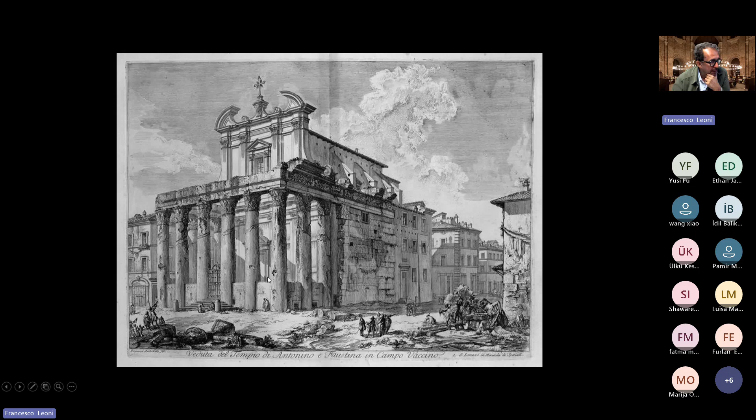of the temple. In fact, if we move back to the previous view, you can see that the level of the ground is basically higher than it used to be during the level of the temple, because the level of the Roman temple was here, while the level of the church is definitely taller, because centuries of dust, ground and overimposition of layers in the city completely changed the possibility of appreciating this building the way it was in the beginning.

Here you can see another building, with restored staircases from the past. And here you can see the way this temple appears nowadays, if you go down and visit the Roman Forum during a spring day like those we are having now.

So this is the point we start with. The main consideration is about layers, and the fact that a building is a living organism that, like all living organisms, changes through the centuries — in this case, the final output of these changes is the building we have nowadays. That doesn't mean the building can't change any longer. What we have to do as architects, as museographers, is to detect, to define, to understand the different layers, and to make them understandable to other people, creating this readability while keeping the unity of the building.

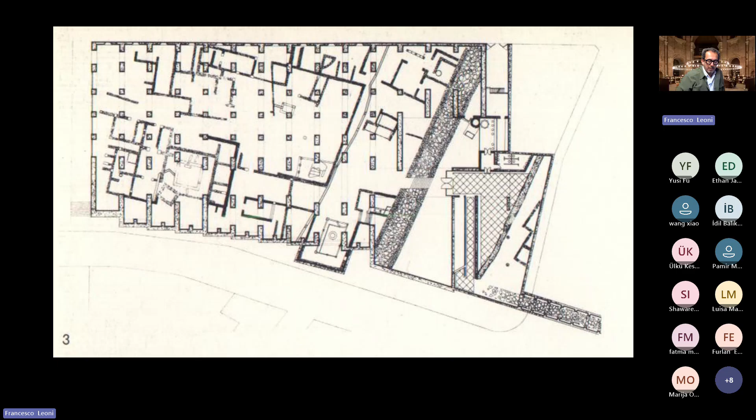But keeping clear that the new intervention, despite conceiving a Roman atmosphere, was something different, something new, and not a completion of the Roman structure. In fact, the interior of the museum is incredibly Roman-like to be understood, because when you are inside this building, you can feel the Romanity of the space, of the architecture.

But on the other hand, the fact that this is a completely brand new, completely contemporary building is extremely clear. You can't be misguided in that.

And if we go down to the lower floor, you can see how the new intervention doesn't completely fit the Roman tissue of the city from the past.

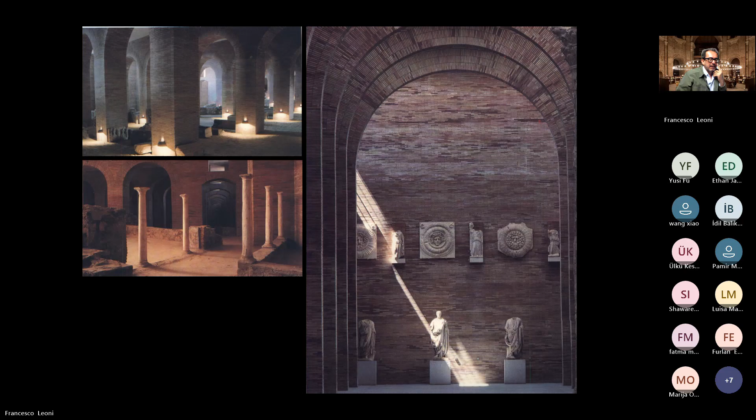Other images of this incredible building. Here it is. Some enlargements, and in this main picture it can be easily understood what is a ruin and what is the brand new building, despite keeping a Roman atmosphere with a contemporary building.

That is a very subtle feeling, a very subtle threshold that requires great sensibility. That is the sensibility that hopefully we're going to develop through our journey together in the Piranesi Prix de Rome, and if you want, even through the master course.

Another paradigm that we always keep in mind is the reconstruction of the Roman theater in Sagunto, a small city close to Valencia in Spain, where a Roman theater used to be. Apart from a restoration during the 19th century, it was restored by Giorgio Grassi with a project from 1985.

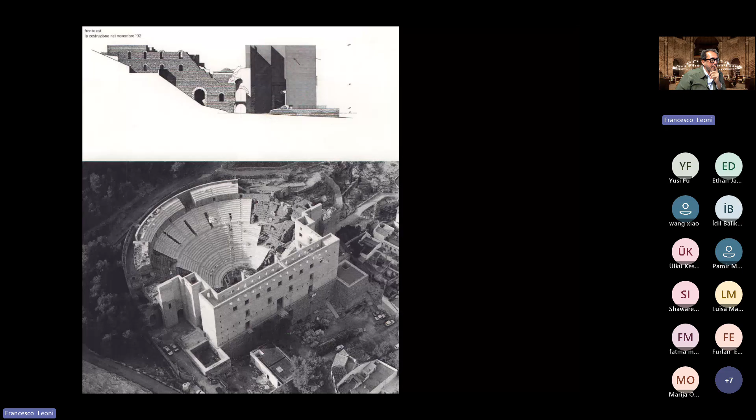This is an image showing the building without the covering, and showing the elevation of the building. Here you can see the building site before completion, before the putting of the roof on the scenery building. And this is the final effect of the building.

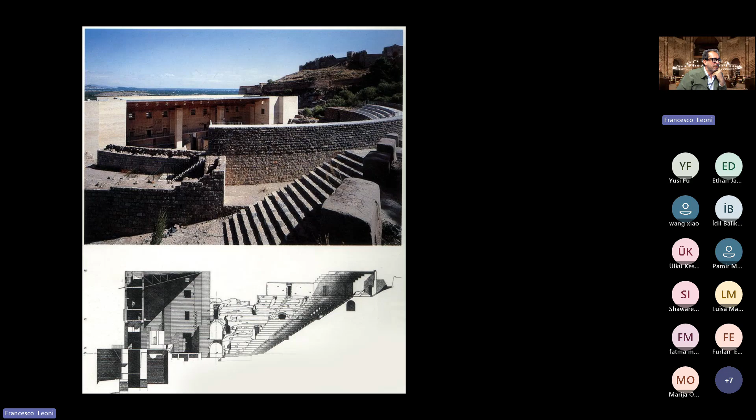Here you can see pretty clearly in the section all the typological parts built up again, and mainly the fact that the scenery building was exactly as tall as the Summa Cavea level of the theater, the so-called cavea. When you enter this building, you can completely understand how this complex used to work, and you can feel the volumetric experience that a Roman visitor would have experienced in that period.

Here you can see other pictures from the place. This could be meant as a museographical intervention, but at the end of the day, this museographical reconstruction gave back the possibility of using the theater for its original function, that is, being a theater. So this museum is used very intensively as a theater and hosts a very important season every year during summer for the people of the surrounding area, who can go there and appreciate performances.

This is the only part that gives a chance to decoration, but in this case, the decoration is done through an anastylosis principle, reusing parts of the ruins found on site to give back the partition of the three orders of the scenery building. Those parts of columns and orders are exactly original, apart from the elements that are clearly filling the missing voids.

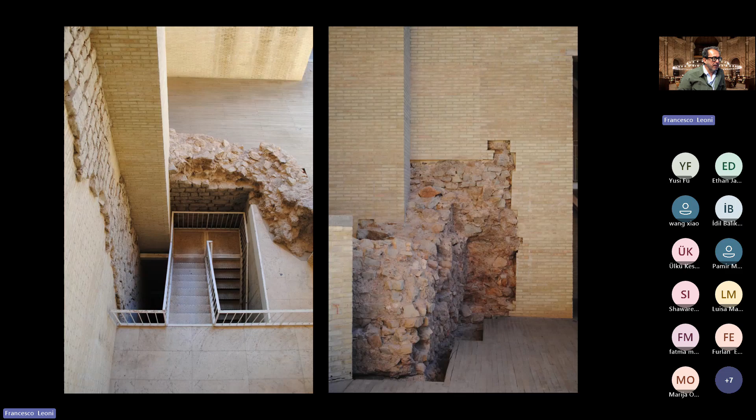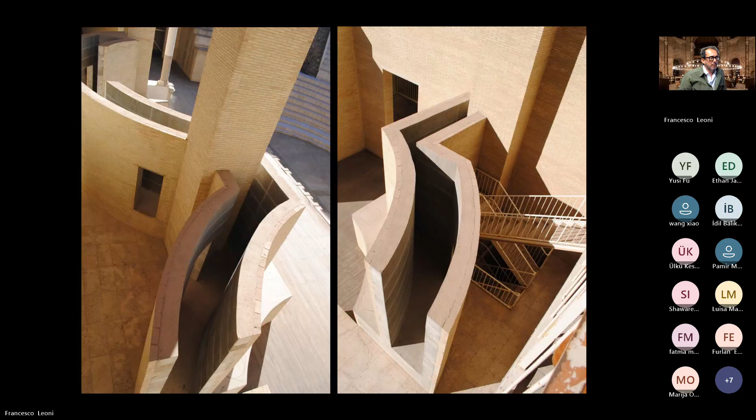Another picture of this building, which, as I told you, has been conceived as a museum. Here you can appreciate the way Giorgio Grassi didn't want to suggest any kind of finishing of the original building, keeping the relationship between the ruin and the new reconstruction overimposed. Some detailing of the walls, the original walls.

And that brings all of us to the topic of reversibility. Reversibility is the concept that has to do with the possibility of completely removing an intervention, bringing the site back exactly to the state it was in before the intervention.

Let us talk about this small temple on the Acropolis of Athens. This is the so-called Temple of Athena Nike. On the left side, you can see the temple erected. On the right side, the temple removed for restoration. In fact, the temple was completely dismantled, moved to the laboratories, restored and implemented, and then built back in its original site.

This is the frontal view. This is the side view. This is very clear, somehow even more striking - the presence or absence of the temple changed a lot.

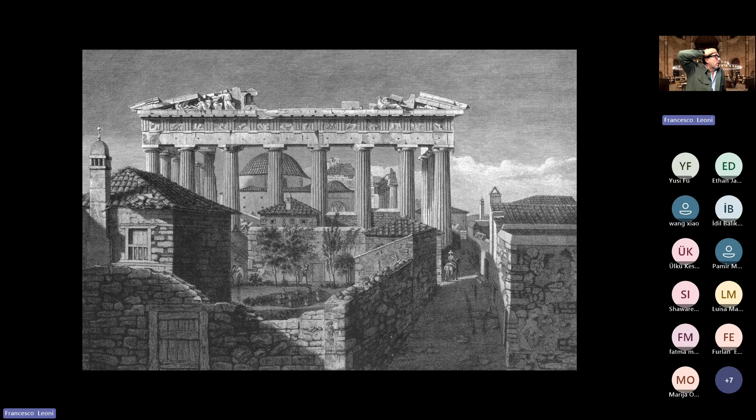That should make us ask again about layers, and also about truth. Still being in the Acropolis of Athens, here you can see how it used to appear in the 16th century. The main building with the 8 columns in front can easily be recognized as the Parthenon, a temple from the 5th century before Christ.

But through the centuries, other buildings were settled in this area. You can see in the first row a private house with a garden and even a pond, trees where a woman is picking fruit, two guys dialoguing or arguing, and a man moving away on the back of a donkey. Even more, there was a mosque settled inside the Parthenon, which itself substituted a former church. So even the Parthenon underwent a lot of changes through the different centuries.

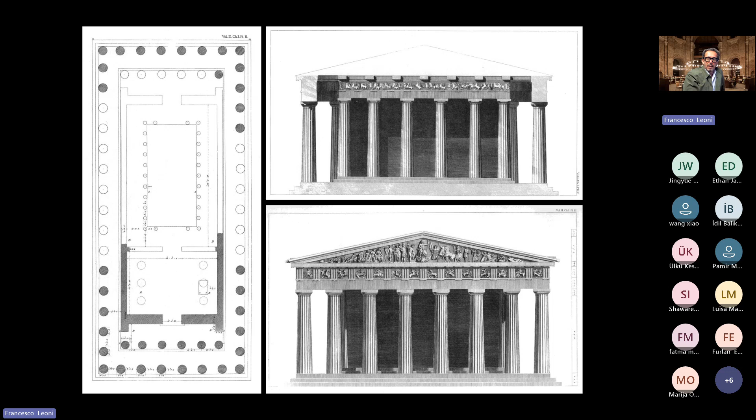Luckily, we still can recognize the original elevation and plan of the Parthenon. At the beginning of the last century it used to appear almost naked, a building missing the cell, the pronaos, and obviously the roof. Lots of parts were missing. That somehow is an amazing, romantic view, but on the other hand it takes away the possibility of understanding how the building used to be.

In this case, reversibility, despite not being fought for from the start, is still possible, because by reassembling all the parts spread all over the territory around the Parthenon and implementing the missing parts, you can reobtain your Parthenon.

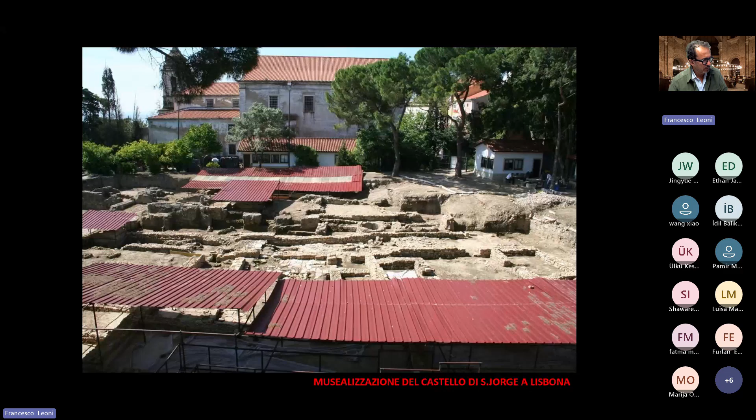This is what you would have seen if you had visited the site until 20 years ago. To bring this area back to life, a project was sought through a competition, which was won by Carrilho da Graça. He started, first of all, with the recognition and recognizability of the ruins, to understand exactly what existed there.

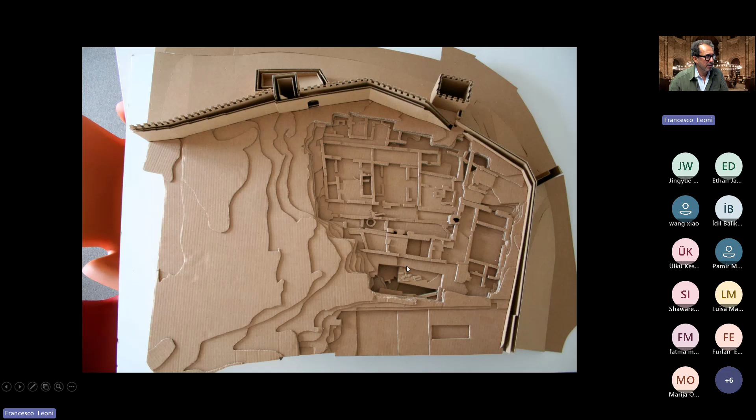We had mainly layers from a couple of eras: some ruins from the Iron Age, and another main layer, the recomposition of a couple of Islamic buildings, courtyard houses, in this area. This is the Iron Age ruin, and this is the Islamic houses area.

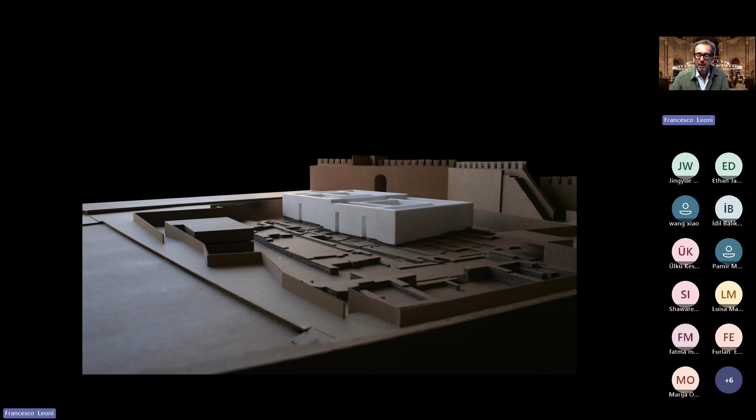The project basically consists in making the Islamic houses understandable and readable, while covering the Iron Age part. The project is not that different from what you can see in this very brief, raw model: the Iron Age ruins were covered with rusty metallic slabs, while the Islamic Age houses were somehow re-extruded on the ruins, exactly on the same place as the original ruins.

That helped people a lot to understand the real volumetric presences in the area, and also gave the possibility of having spaces for exhibiting some collections on site. This went along with giving back accessibility to the area, cleaning the pavement and recomposing it through a process of rammed earth.

The first thing Carrilho did was to redefine the holy precinct, the boundaries of the area, with elements in Corten steel that define what is inside and what is outside the archaeological area, accompanying people as they go down through this process of entering the ground, as any archaeological area should, defining exactly the limit of this museographical intervention.

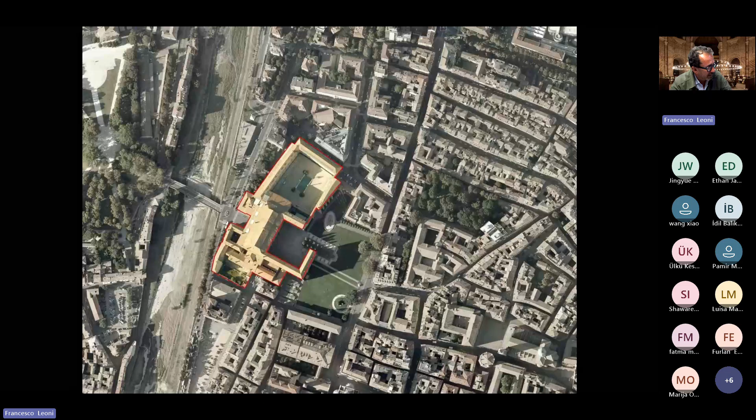This is the project for the musealization of the Pilotta Palace in Parma, Italy, by Guido Canali, an intervention realized over different moments, part of which has been closed to visitors in the last 10 years. Here you can see the Pilotta of Parma, actually called Palazzo Farnese, the building that hosts this intervention.

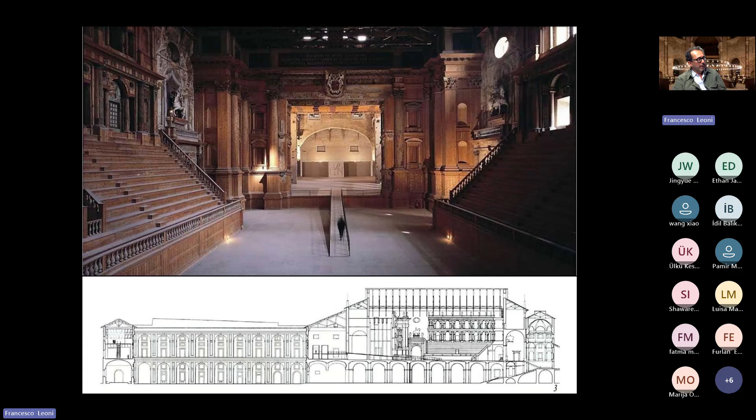Guido Canali decided to put the new entrance to the museum through this main theater, this main hall with a reconstructed wooden theater inside, so people can enter through here.

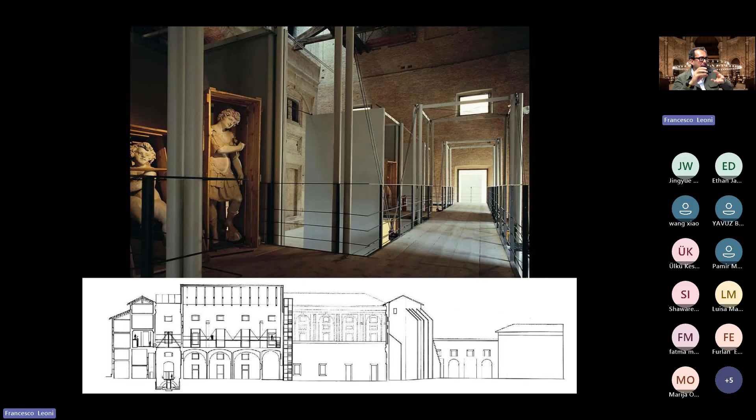As the title of the chapter already tells you, an independent structure lives inside the main historical building. So the museum is an independent structure inserted inside the main building.

This independent structure is independent not only structurally, but mainly from the formal point of view, from the image point of view. So you can strongly recognize the new intervention from the quality of the historical architecture.

This independent structure allows us to host the paintings and all the pieces of art exhibited in this museum. This room in particular is an amazing one — you can see how powerful this image is, with all those panels hosting incredible paintings hanging from the artificial roof.

This independence can also be seen in other rooms with a different formal approach, but keeping this idea of a new parasite living inside the main building, all around it. Here you can see other possibilities. If you have the chance to visit, I strongly suggest it — it's in Parma, a very beautiful place to see and visit.

Keeping somehow the same approach, Guido Canali also intervened in the musealization of Santa Maria della Scala in Siena, another incredible city in central Italy. Here we have this building that used to host the hospital of Siena, the former hospital, since the 15th century.

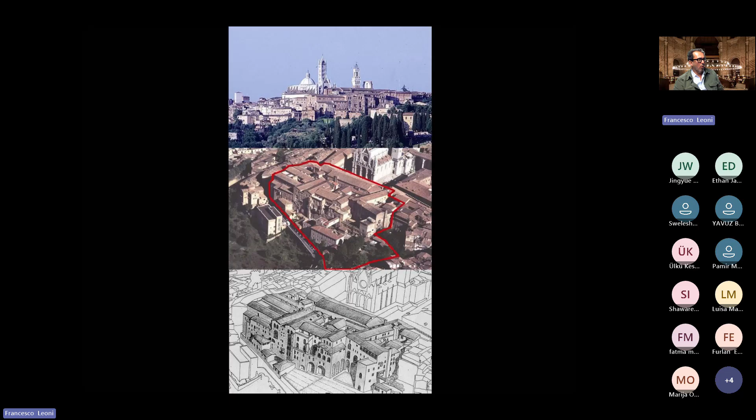Inside this abandoned building — since new technologies require different architecture to host a contemporary hospital — here we can see the entrance of the building and its development across lower layers in the hill.

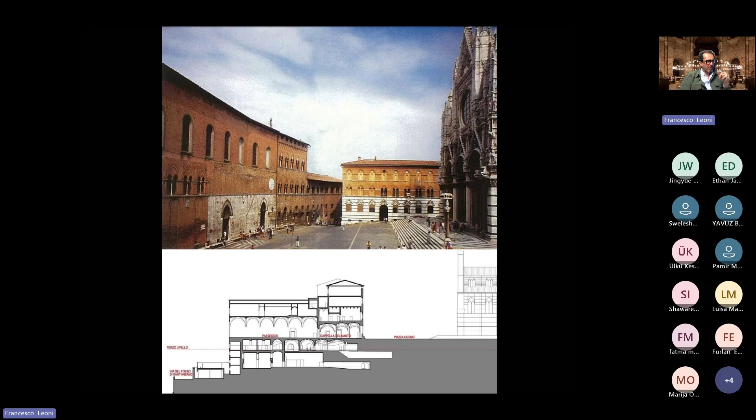In front of the entrance of the building we have the Duomo of Siena. And this is the very complex plan of the archaeological remains underneath the ground.

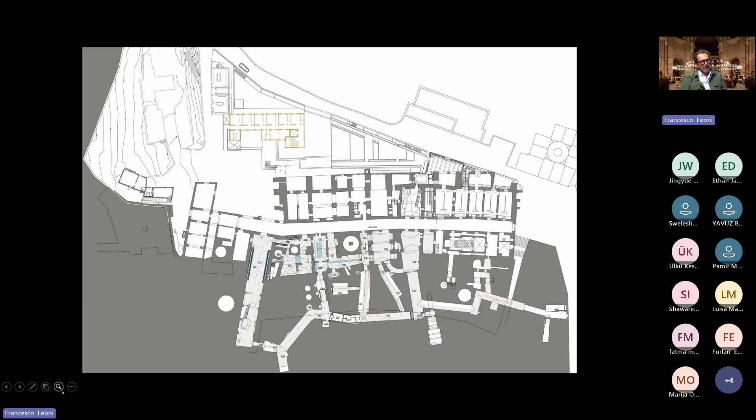It is clear because it's in the bottom part of the view. When Guido Canali entered the building for his project, that's what he found: ruins, rubbish, and mainly lots of skulls and bones, because usually the corpses of the dead people were left in the lower level of the building as a sort of cistern for death. You can clearly recognize some parts of the legs of people, some parts of the hip, and so on.

The new building or the new interventions, again from Guido Canali, is basically an independent structure that lives on its own way, always compared to the all-around structure, the envelope composed by the historical building. So the new intervention is something that is hosted by the original, historical building.

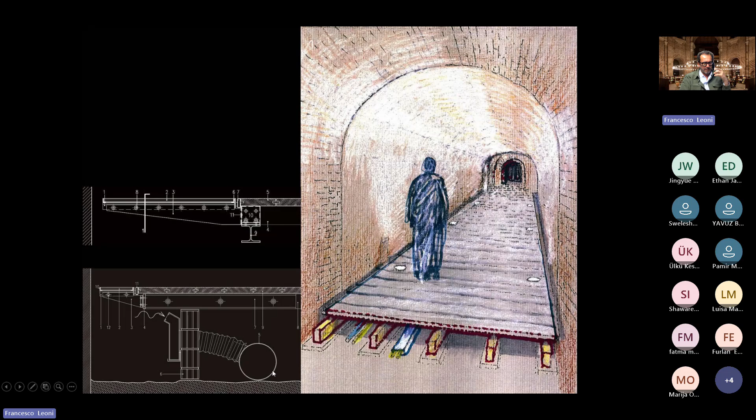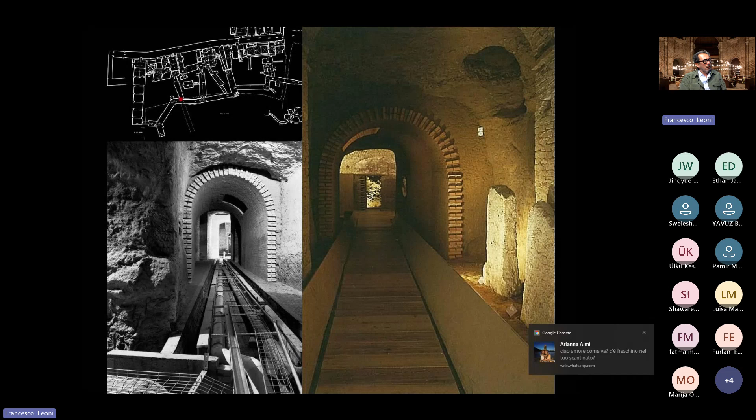The idea was to create a new pathway that was the covering of all the system that would have run underneath it. Here you can see part of it, and a worker still working over there. Here you can see how this intervention finally appears, with the system running underneath, then covered by the new pathway. You can clearly understand what I mean by independent structure compared to this kind of approach.

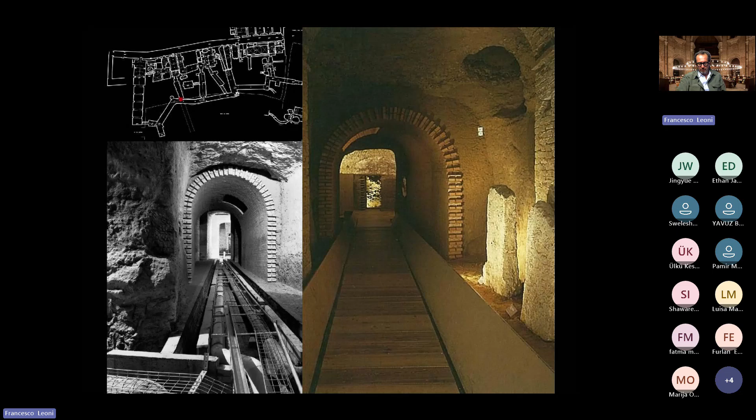Here you have views of the interior part of this museum, the showcases, and the new pavement covering all the way through and hosting all the elements of the collection. Some images again.

The craftsmanship from Guido Canali is a masterpiece of museographic design. Even from the structural part, there's a lot that could be said, but I don't want to bore you too much. Let's move to the 5th chapter of this approach, and then we're going to have a last part that is more about tools.

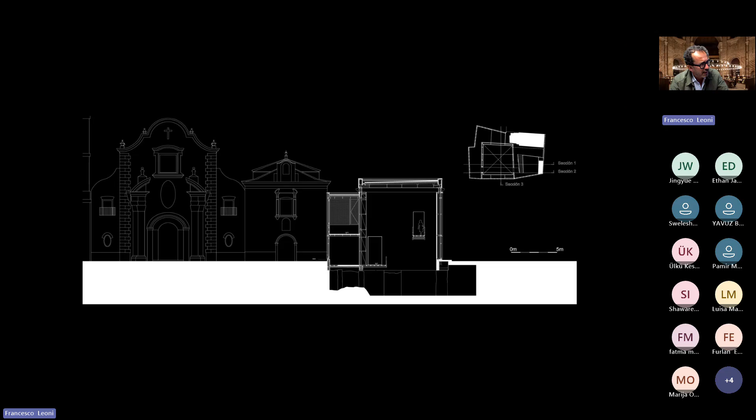This chapter has to do with continuity and discontinuity. This is an intervention from Amann Cánovas Maruri in Murcia, Spain. The building is just beside the cathedral, the main church of the town, where they found some archaeological findings. So they decided to cover it with a new museum, a new cover that should have turned the place into a museum. Amann Cánovas Maruri decided to build over the ruins a new urban showcase that invites people to enter, but that hides the findings from view from outside.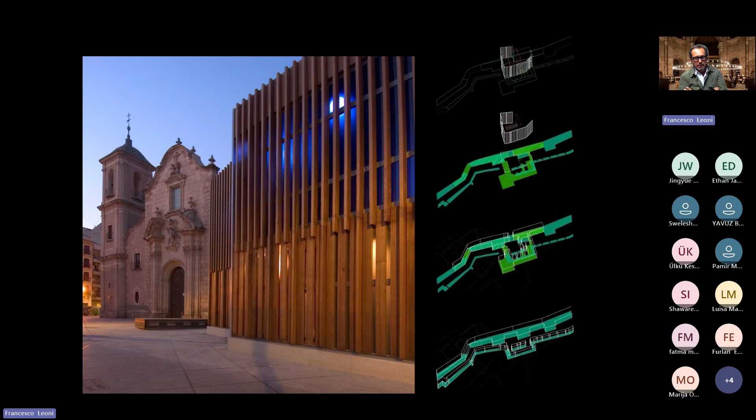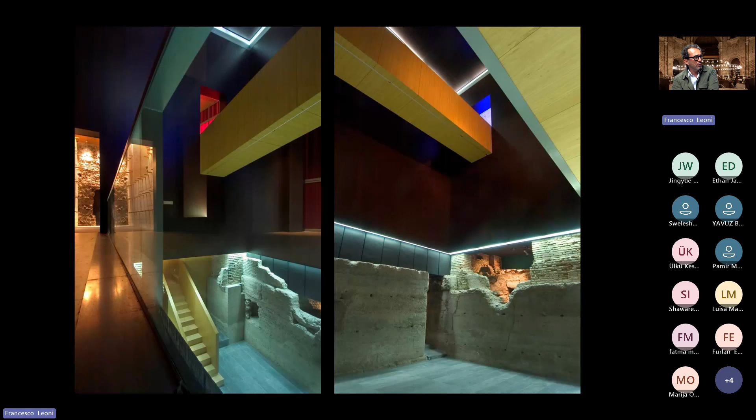Here you can see the building, which in this case adopted the idea of discontinuity from the formal point of view with both the cathedral and the ruins underneath. Inside the cover, inside this great showcase, the quality of the space is completely dissonant from what you expect to experience. Here you can see the space inside, and you can see how strongly the discontinuity is emphasized between the new intervention compared to the findings of the ruins underneath.

Another intervention following a similar approach is the musealization of the Arab bath of Baza, still in Spain. Here the project was to musealize those Arab baths and cover them, protecting them from atmospheric agents. So they decided to create an envelope covering and protecting the Islamic bath, somehow even hiding it. Once you entered the building, you would find this kind of solution: the new roof creating this ceiling, letting the light touch the old ceiling of the bathhouse, creating this atmospheric view of the site, very fascinating and somehow even romantic.

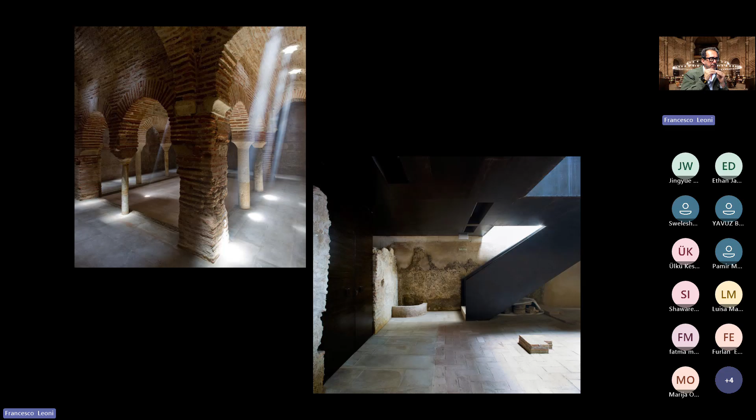Here are some views of the intervention. Again, even in this case, there's a strong discontinuity between the new intervention and the old one. The old intervention is basically virgin, almost untouched. The old ruins are still there, completely untouched by the new intervention that just covers it. It's really, again, a kind of envelope. Here you can see how the volumetric aspect of the area is basically the original one, apart from some glass elements to close some holes or some uneven pavement that could have been risky.

But another way to work with protection is the monumentalization of the protection, the monumentalization of the showcases. In this case, we can definitely use as a reference a project that I guess all of you already know, the Kolumba Art Museum in Cologne, Germany, from Peter Zumthor.

Here you can see the plans and the elevation of the building. The new intervention is pretty clear because it completely overimposes on the level of the ruins.

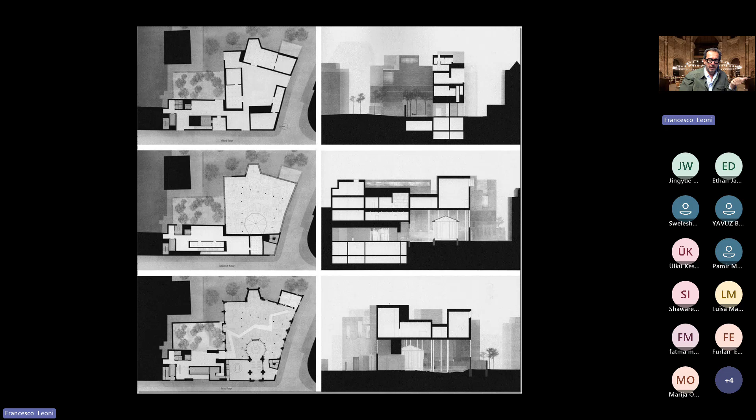The ruins here were very complex, hosting lots of different layers: a Paleo-Christian church, a Gothic cathedral, and even a little church from the 50s, all kept. The new great envelope, the great monumentalization, goes completely independent from the ruin, apart from following some elements still existing there, incorporating and encapsulating, for example, the Gothic ruins of one of the layers. Inside you can appreciate the entirety of the space because the new envelope is suspended on slim and tall pillars in concrete.

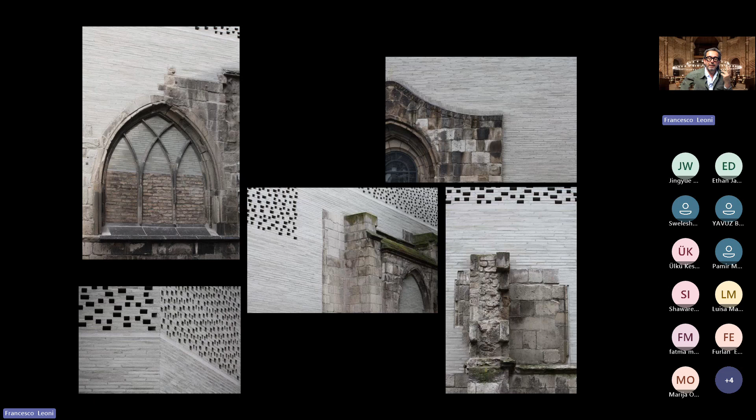The quality of the interior space, trust me, it's unbelievable. And all around, you still have this monumental envelope that keeps everything outside together in a very strong and powerful intervention on these ruins.

Another monumentalized intervention is the Bougon Burial Mounds Museum from Studio Milou, completed in 2000. Here you can see the area, which is quite bucolic, where some ruins from a burial mounds area and buildings that needed to be protected were completely covered by a new showcase, a very sleek and contemporary showcase, a real showcase because it's completely glassed.

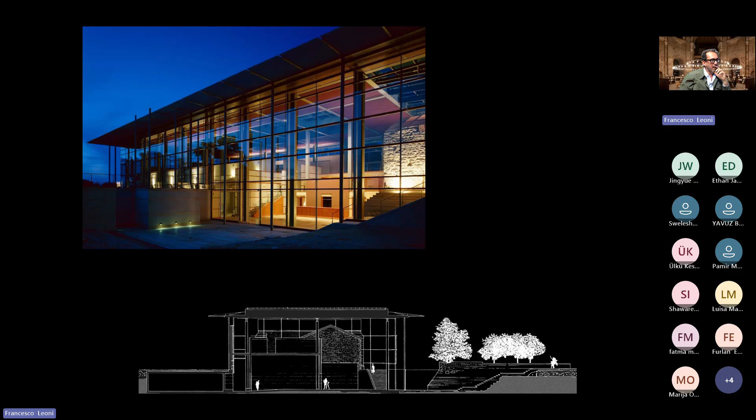Here you can see how the new intervention affects the surrounding area and the way these buildings are covered by the new element. This is the design of the area. The last church has been kept open and is still in use.

Here you can see better. Inside this big showcase, you don't look at the collection from outside. So the collection isn't a showcase where you stay outside - you enter the showcase and you live within the collection, within the buildings that are kept inside.

Another great possibility to intervene in an archaeological area is the one that includes working with landscape. Let me show you the musealization of the Roman theater in Clunia, in Spain, from Lab Pap in Valladolid. This was the Roman theater over there, as you can see from this picture.

It was mainly difficult to perceive, difficult to understand because of its own position. It almost looked like a very peculiar geologic subtraction more than a real theater.

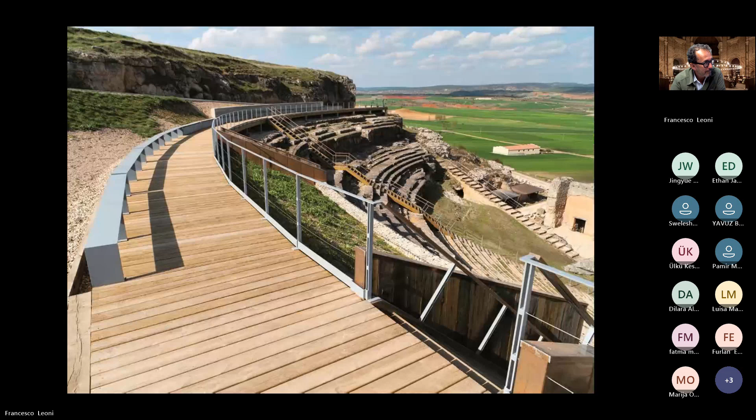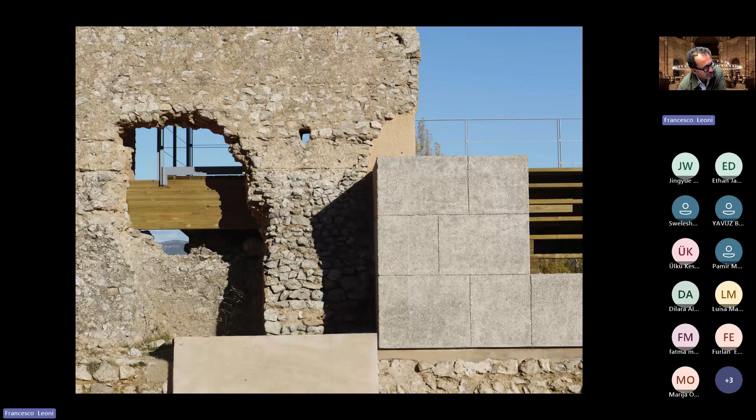You can see how beautiful the view is from here. All the elements seem to be strongly reversible, and the intervention looks like it was put there as a sort of blocks superimposed one on the other, like the Greek architecture I showed you in the Acropolis.

It's definitely very evident how strong the connection with nature is here, and also the use of metal cages with big stones inside wants to evoke an idea of reversibility, of something that has a temporary life in this intervention, despite the fact that this intervention can possibly last for a long time.

Another intervention that follows this kind of approach is the musealization of the archaeological area of Can Tacó, close to Barcelona in Spain. Here, Toni Gironès found this area where a Roman villa used to exist. As you can see, before his intervention, the Roman villa was completely unrecognizable.

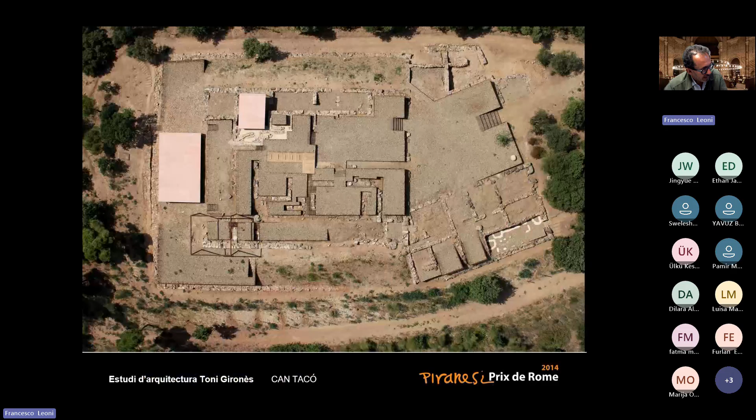His intervention simply modeled the ground, with the lightest and least volumetric approach. This is what he found when he arrived, and this is the final effect. In this way, he not only redefined the different pavements of the different areas of this Roman villa, but also gave back to visitors the possibility of understanding that this was the sediment, the settlement of an archaeological site.

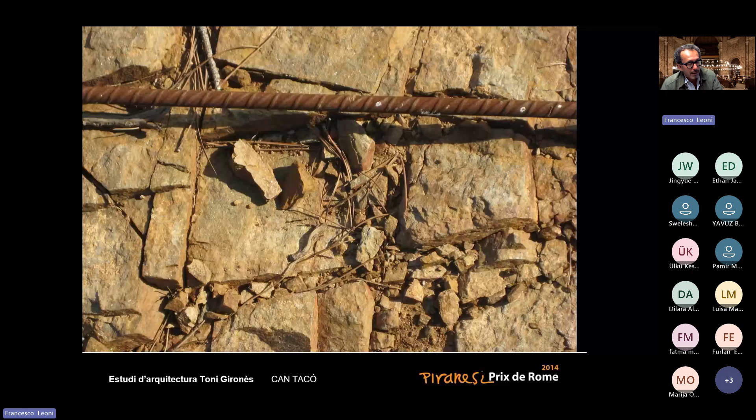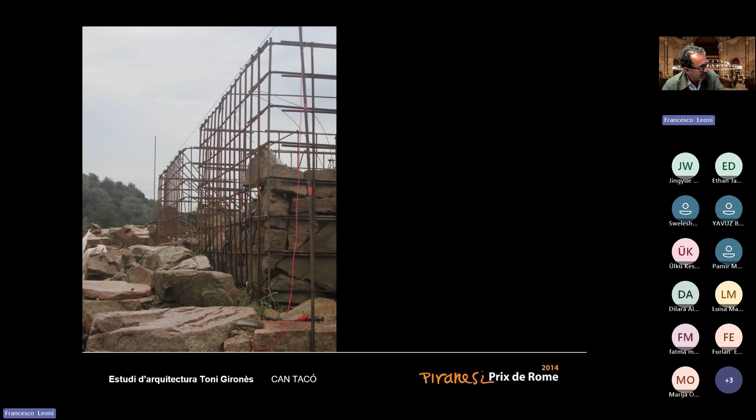Everything, again, was built using this very cheap precast technology, that is the usage of cages to keep stones inside. This way, everything is completely reversible, because you just need to take the stone away, then dismantle the metallic structure, and the situation is brought back to its original view. The effect is very ephemeral, as you can see from these images, despite being very present somehow.

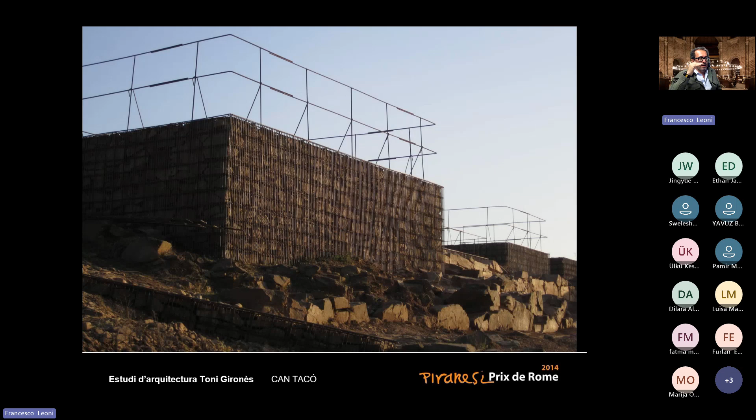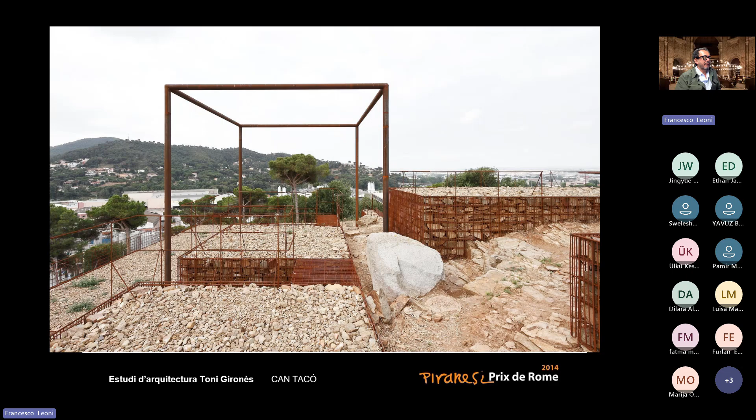Here you can see the level again reinforced and redefined by the view, and this is what you would see if you visit this area from a human view, a human eye. This is the only volumetrical suggestion from the designer, just to give you a hint of how tall this building could have been.

These are other pictures of the intervention, basically an intervention that has to do with the redefinition of the grounds, of the levels. A very intense, somehow even poetic attitude, keeping an archaeological area in its own aspect, and involving its continuity with the surrounding.

Again, the aerial view. A great pro of this intervention was that its cost was 69 euros per square meter, that is basically nothing. The entire intervention consisted of 163,000 euros, a very, very cheap expense for such an intervention.

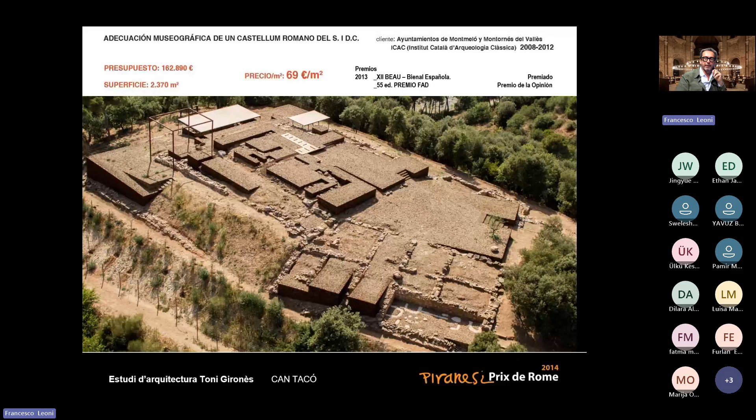So now I've shown you the 7 possible approaches you can have to working in the archaeological area. But now let me suggest some tools. How can you draw at Piranesi Award? What are you supposed to do when you are going to be there? Which kind of tools can you use?

I'm going to give you this indication, but then I'm going to tell you about it better. The Piranesi Prix de Rome is generally designed according to the academic tradition of which the prize is the custodian, using freehand and manual drawing in general, also in color, on the model of the French pensionnaire. So redesigning things by hand, if you are able to.

If you instead are more skilled with digital design, you can use digital vector design, measurable with views essentially in orthogonal projection. The drawings can be by line, black on white or negative, with possible half-tone backgrounds and shadows. So when you go to design something, you do need to design it through vectorial drawing, because everything still needs to be measured, not something designed without keeping in consideration the real dimension of the site.

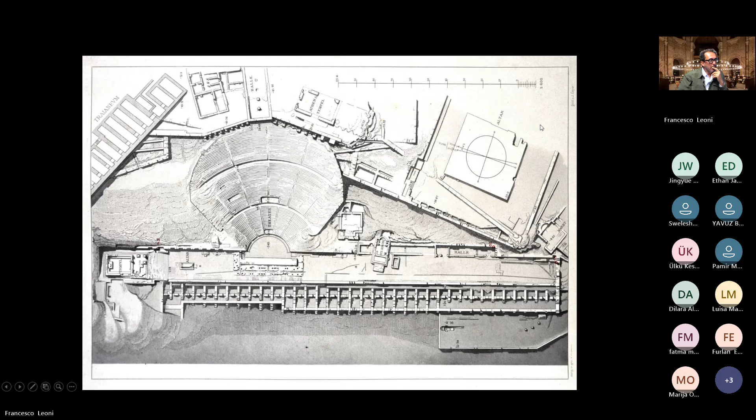A closer view, in this case with also the indication of the orientation. And this is some closer view.

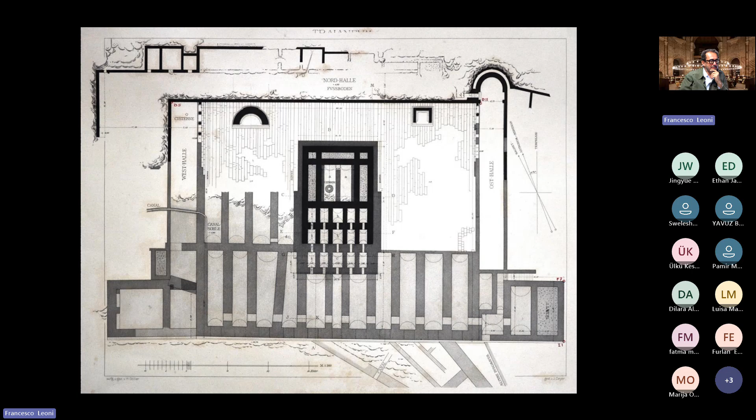This is a plan, another plan with details, and again other details. I guess you are not going to design something like this. Don't worry, we don't expect you to produce such drawings in such a short time.

But for example, if you look at these drawings that use exactly the same technique, those are drawings from the beginning of the 2000s. These are some plans drawn by Enric Miralles around 1999 or 2000, but you can clearly understand the quality of the drawings. That is something we really love.

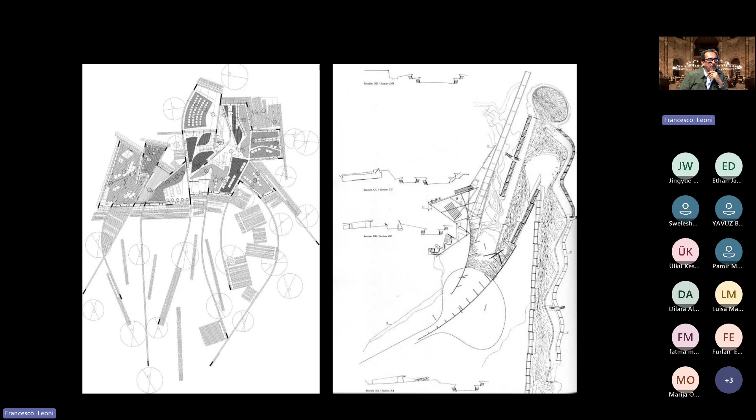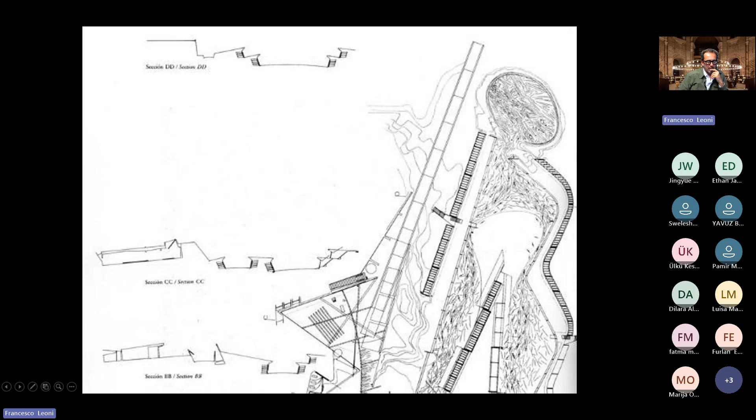You can see the plan on the right, and on the left, all the sections of the different levels. This is the design of the first project for Edinburgh. I don't remember the name of the building.

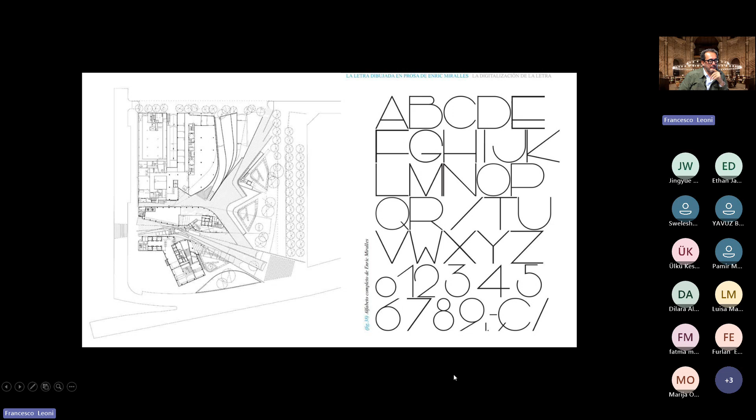The Parliament, the Scottish Parliament in Edinburgh. On the right, using the same approach, Enric Miralles also designed his own alphabet and even the numbers. This is a thesis that was designed in 2002, or 2003, I don't remember exactly the year. So more than 20 years ago, using exactly the same approach, but through AutoCAD. So if 23 years ago we could have drawn something like this, I guess we can even do it nowadays.

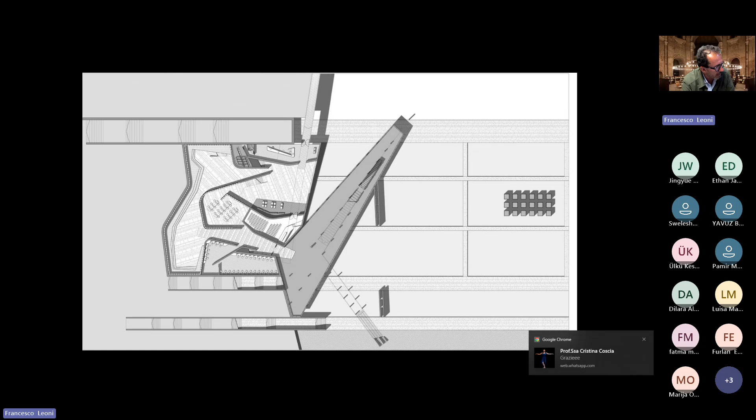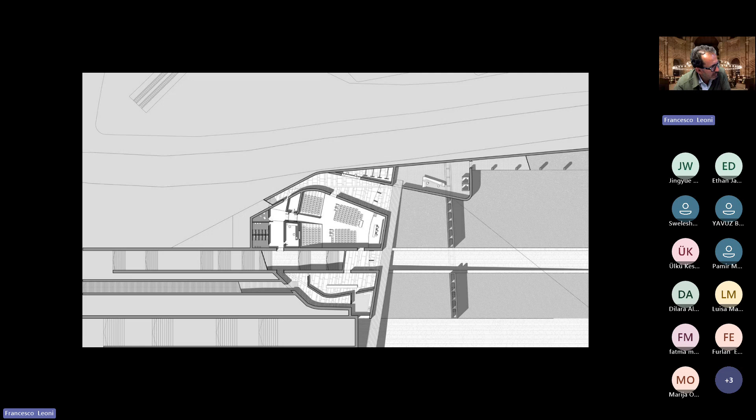This is a thesis project from Giulia Ciglione. Here you can see how the technique is exactly the same, but using AutoCAD. The drawings are perfect, the depths are understandable because of the shadow. We don't mess too much with all those colors that, if not used in a very proper way, could misguide the reader. And here you can see another thesis from 25 years ago, insisting on the Roman Forum.

When you come to Premio Piranesi, we strongly suggest you start working using your own sketches, like this one, that help you in a very fast and comfortable way in producing the project. Going on the site, trying to analyze, and control if what you are wondering can be applied on the site straight through drawing by hand is a very important and great tool.

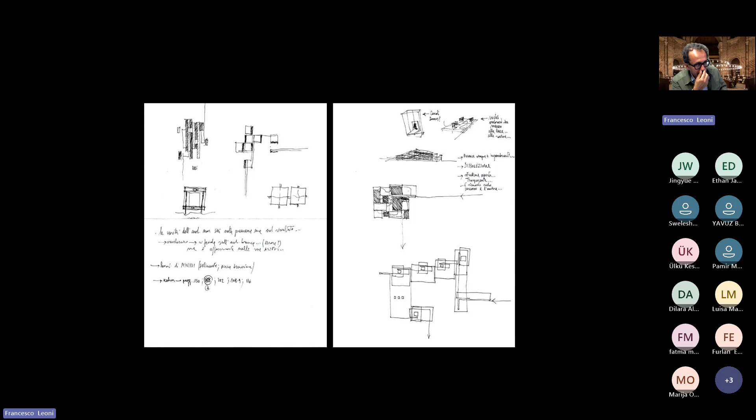Obviously, to do that, you are supposed to be able in freehand drawing, but you are not able if you don't train on it. And those easy, recognizable and understandable sketches help you a lot in producing a proper project on the site, because you have continuously the possibility of checking the correctness of your project. Then those sketches can be turned into matrices, into other considerations, to produce a final output with the project that starts to take life. And then this is what can be produced.

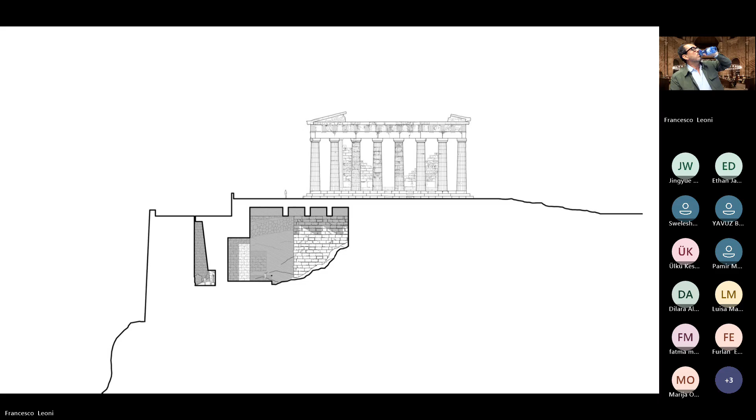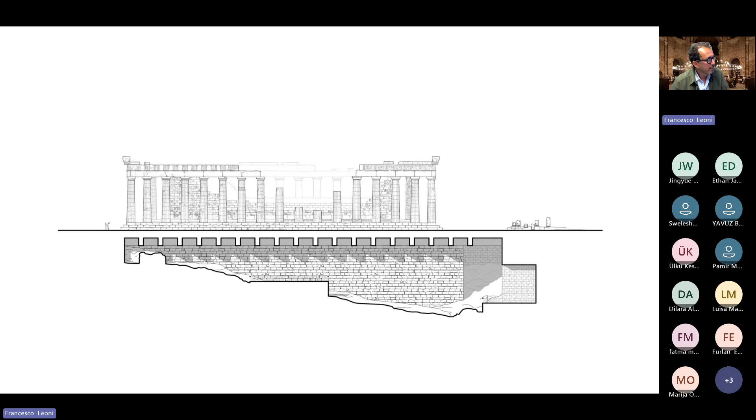This is another project on the Acropolis of Athens. The previous one was the transversal section. This is the longitudinal section of the project. And again, black on white, strong shadows that help us in understanding the depth. And the project is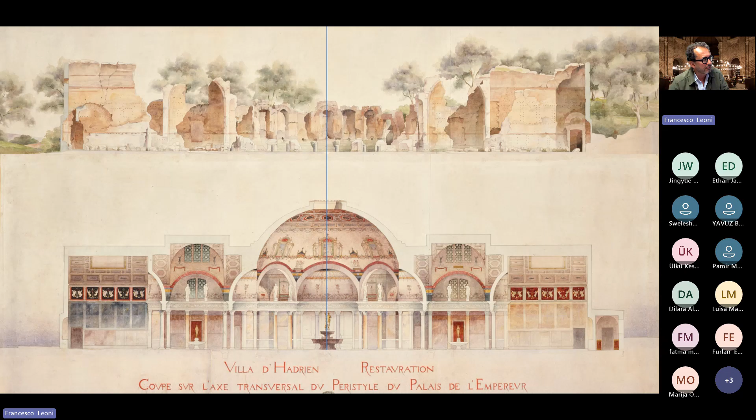clearly comprehensible, exactly the way the pensionnaires of Prix de Rome used to do: going on the site, designing the survey on the higher level, and then proposing a project on the lower level. In that case, they produced real paintings, real good quality drawings, that honestly we don't expect you to produce. You don't have the time and probably not even the skills. But this is what they used to do.

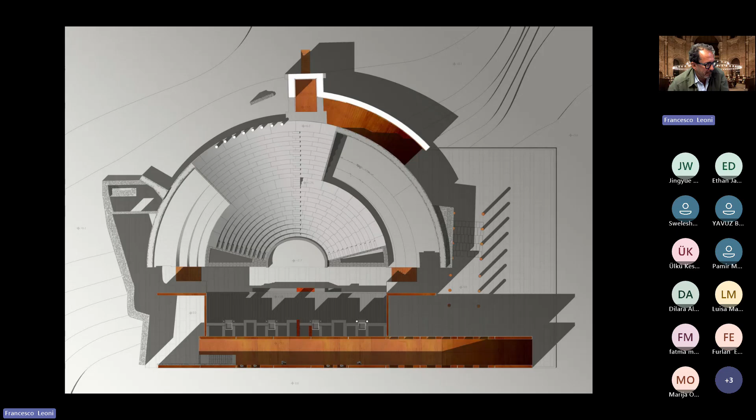And this is a project that was produced during the Premio Piranesi in 2003, so 23 years ago. Students like you attending the Premio Piranesi 23 years ago produced such a drawing. Everything is vectorial, everything is measurable, and then they used Photoshop in the end to apply some colors. But basically, the main project, the main drawing, is black and white in shades of gray. And then at the end, they applied

the materials in Photoshop, in the end. But actually, 23 years ago—now the technology has improved a lot. Actually, this was a very good group of students, but why can't you do that? Also, because all the drawings we can show from other examples are similar.

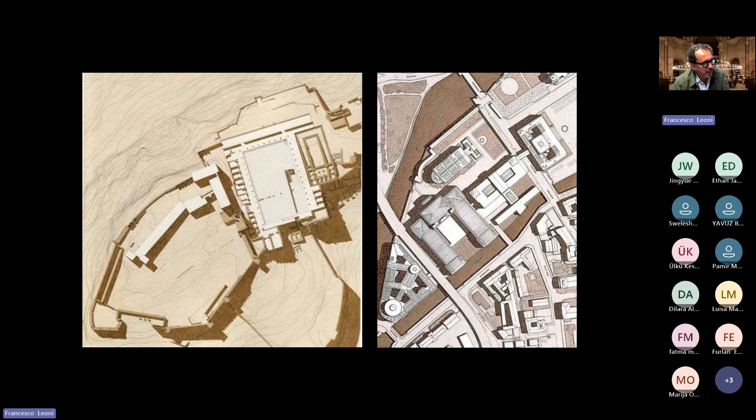On the left, we have the drawings of the castle of Sagunto, where the recomposition of the theater by Giorgio Grassi has been done. On the right, the German drawers, the topographer, redesigning the Museum Island in Berlin. On the left, there are the drawings of the castle of Sagunto with the connected photograph on the right. These drawings were done by the office of Giorgio Grassi by hand.

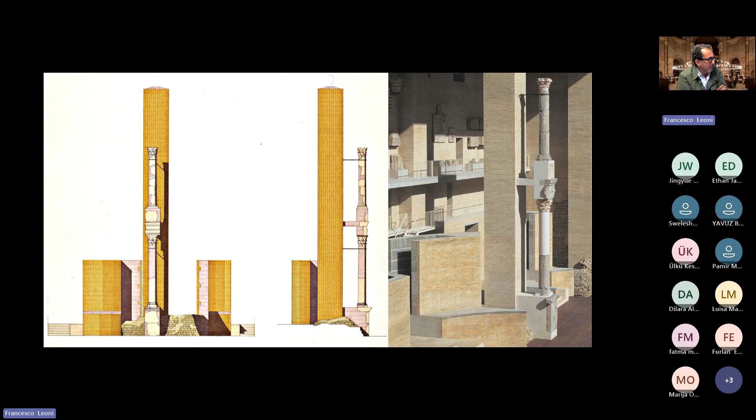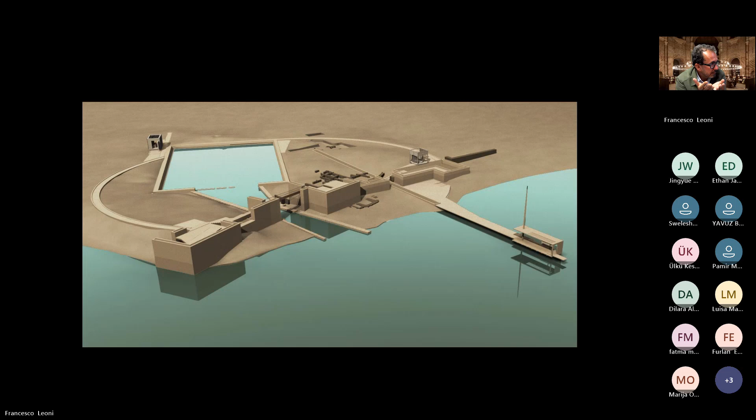And those are renders from 2004, for a project that was designed by the group of Professor Caliari on the island of Mozia. The renders produced by Filippo Fantini 22 years ago are exactly what we would like you to do. So the renders are basically of a model, renders of a model without peculiar textures, without any will of being too photorealistic, but with the goal of being completely understandable and fascinating.

Don't worry about all of that, because you will be guided by your tutors in how to produce your final outputs. But this is what we ask you to do.

Again, those renders are from 22 years ago. Now the world has moved on, and the technology permits you to do a lot more than that.

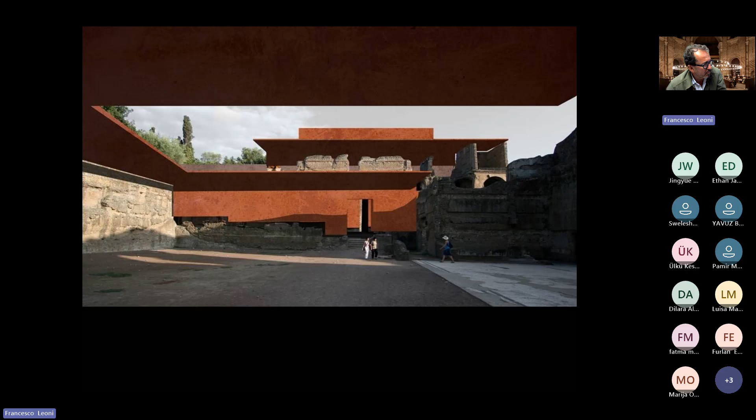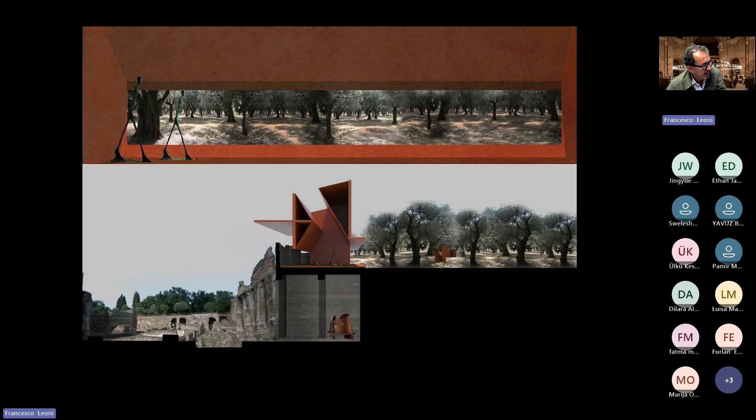For example, those are projects from the Premio Piranesi with photo insertion. This is a project, I guess, from 2014. This is the external view, and on the upper part, the internal view towards the olive tree field. Underneath, we have the section.

Another photo insertion of the project, straight on the ruins.

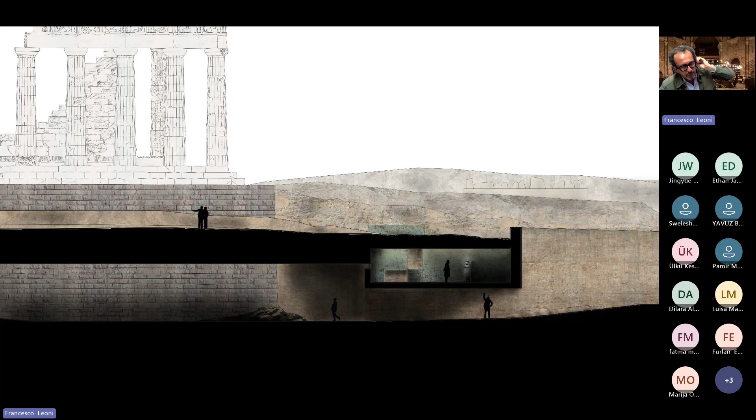This is the poetic interpretation of a project we proposed on the Acropolis of Athens, where people can enter the surface of the Holy Rock through this romantic pathway. You can see here the narrowing of the section on this part.

Then after that, it opens up to a larger museum area like this one, where people can appreciate the substructure of the Parthenon, and where some photo insertion of elements from famous paintings gives back the atmosphere that we would like to obtain.

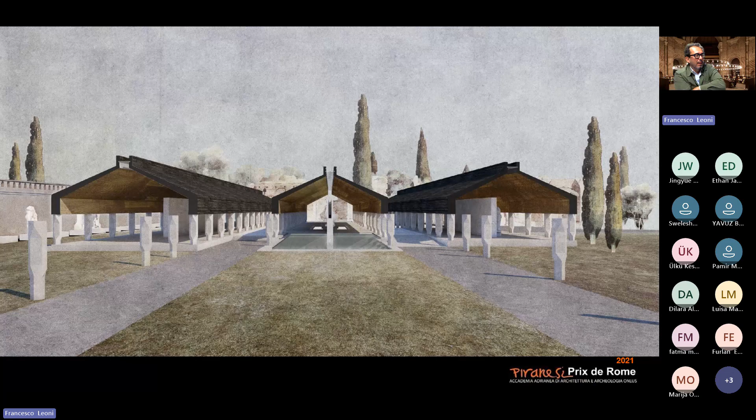If you attended our Premio Piranesi presentation, this is one of the projects we usually show students to tell them which kind of outputs we would love them to produce.

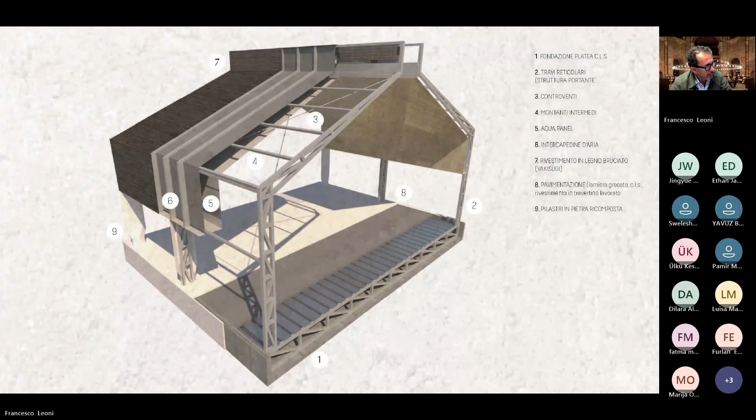This is a project from 2021, so nothing that far from now. The technology helps us a lot in understanding how your project can work. If you remember the project I showed you about Carrilho da Graça, you can clearly understand where this project comes from, and this detail comes from, showing the technology keeping the building working.

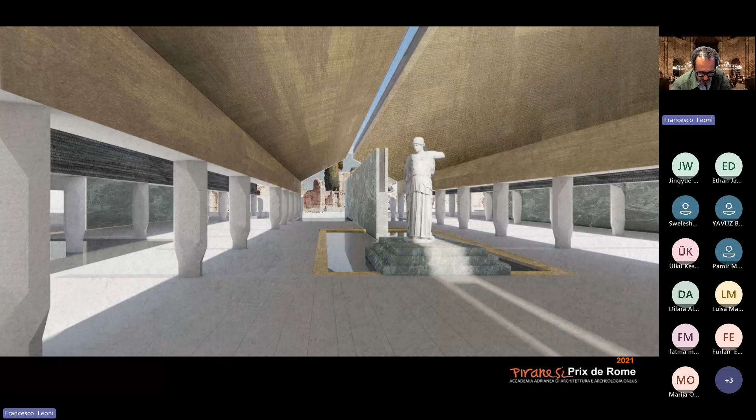This is an internal view of the area that has been produced at the end of the designing process. Another internal view of some project, in this case, from 2023.